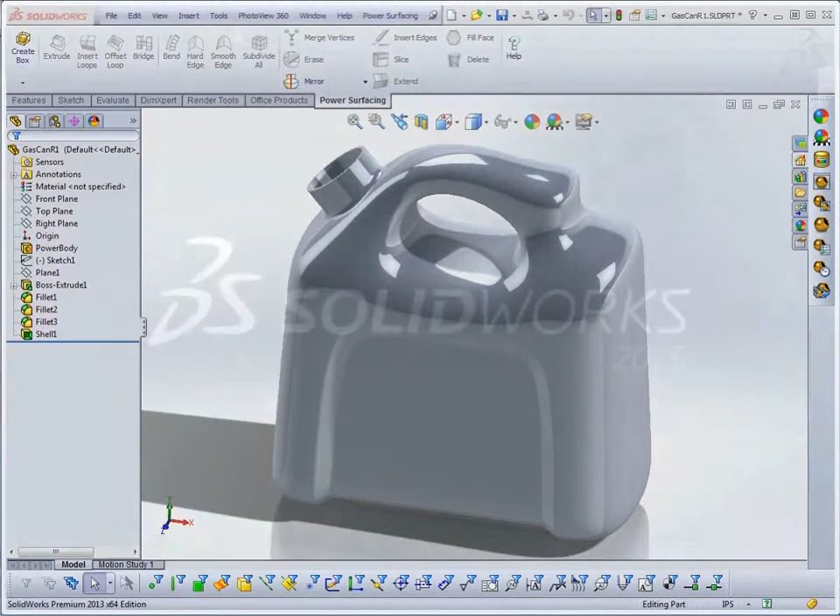Today I'm going to create a variation on the classic gas can using Power Surfacing in SolidWorks. There are a couple of different methods you can use to get started, but for this one I'm going to start directly in the Power Surfacing tab, Creation Tools, and Create Box. This automatically creates a new part file. The box primitive is centered on the top plane at the origin point.

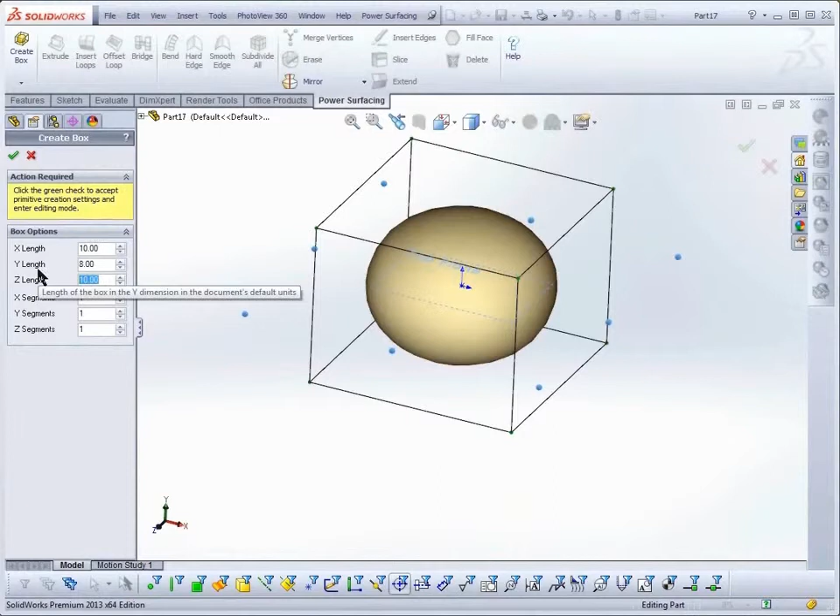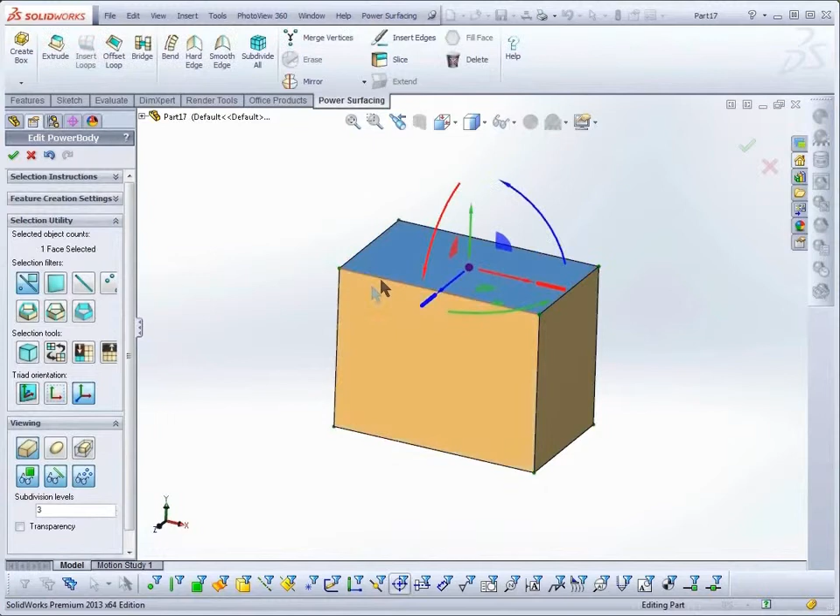I want my box-shaped control mesh to be 10 by 8 by 6, so I'll type in the size and then accept to go into edit mode. The default display mode is SubD plus cage. The more subdivisions you have, the closer the SubD resembles the control mesh. So until I've added a few more loops, I'm going to toggle control mesh display mode on in the viewing section. I'll start by selecting the top face of my box and scaling it in on the world Z-axis.

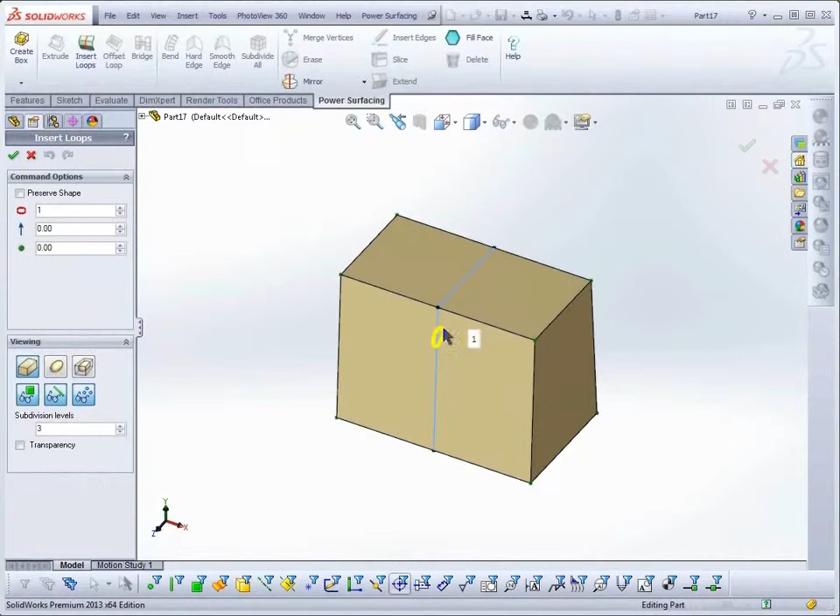Since I'm in Select Any mode, I can hover over an edge, double-click it in the center to select the edge ring, and then from the right-click menu, choose Insert Loops. I need a couple of loops, so I'll use the Increment Value gizmo and drag up in the viewport to increase them to 2, then right-click to accept.

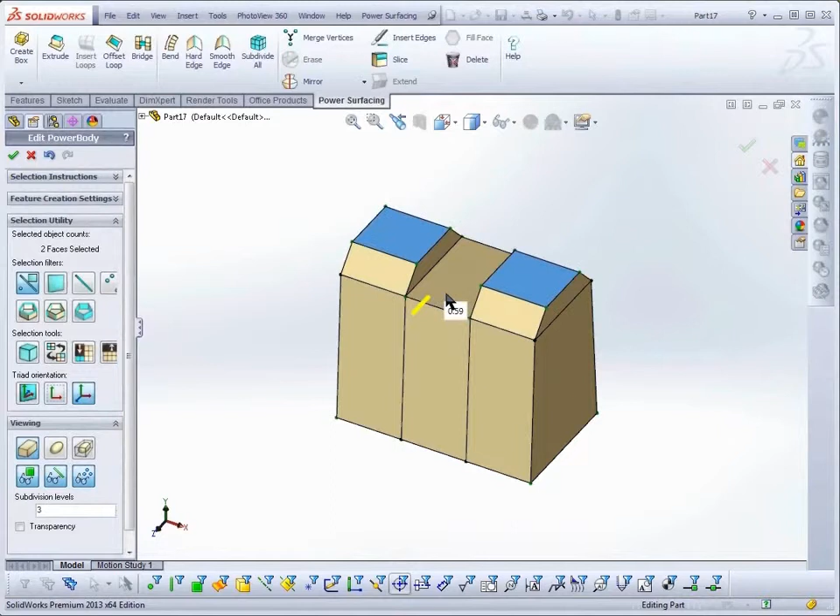Back on top, I'll select the two outer faces by holding the Control key down, then switch to the A key while pulling the Y-axis of the triad up for a quick extrude. While I'm there, I'll scale them in a bit, and move the front edge back to start to define the slope where the spout will go.

I'm going to need one more loop at the back. For edges, if I hold the A key down and hover over an edge, I get a preview of the loop to be inserted, and then I can click where I want it. It's important to remember that the SubD edges will not end up where the control mesh edges are, so there's no reason to try to be exact at this stage. Now I'll switch to just face mode while I make the handle.

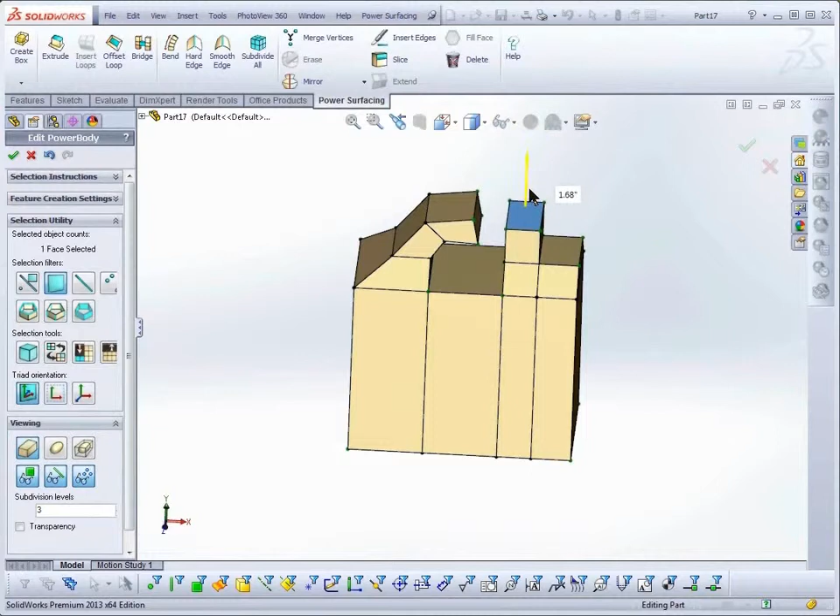I want the front of my handle to flow back from the spout, so I'll extrude using the A key and rotate the top face a bit. Then, using the local coordinate system, I'll scale it in a little and extrude again. Next, I'll extrude the back piece to match. After selecting my two faces, I'll pick Bridge from the right-click menu and Accept. This time I'll use the familiar green check mark. I'll select the new faces and scale them in.

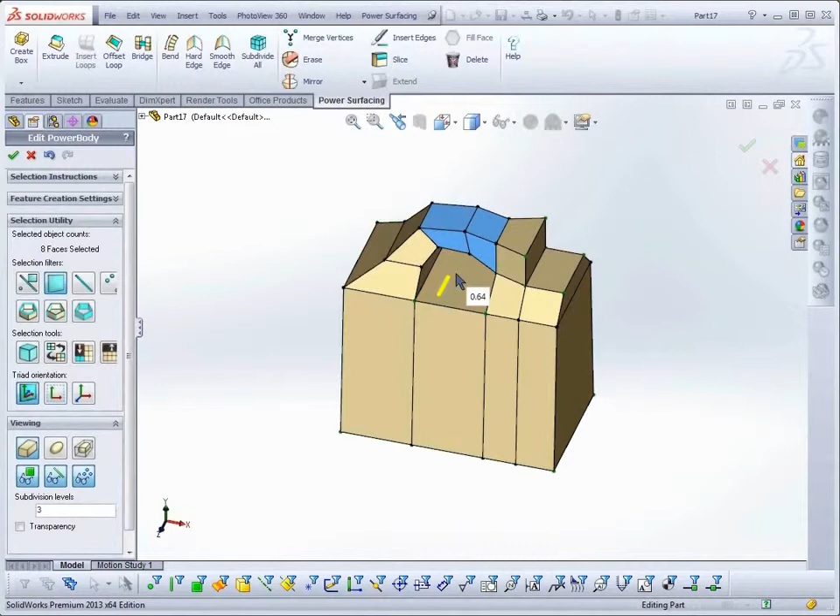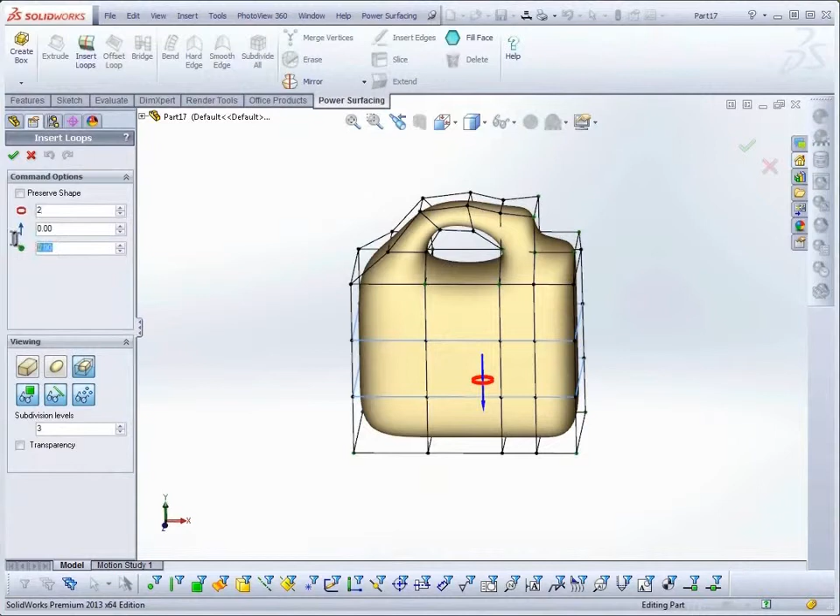Just to show you what a few extra loops can do to the shape, I'll switch to SubD plus cage for a minute. The body of the gas can is still pretty rounded near the base. So I'll select my edge rings and use Insert Loop again, and set the loop count to 2. But this time I'm going to set the pinch loops to 50 to spread them apart so the SubD is pushed out closer to the control mesh cage. And right-click to finish. Now I'll select the SubD display mode from the viewing section.

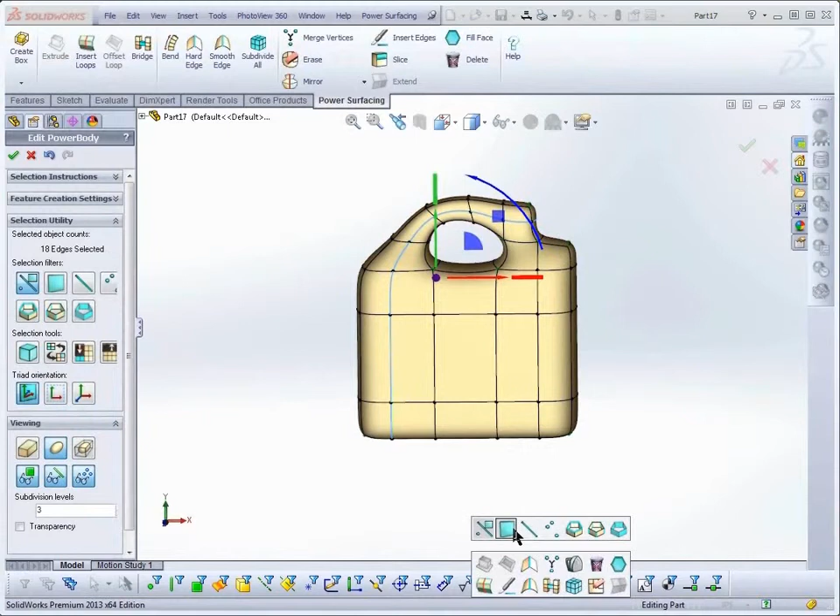To get the inset area, I need to drop one more loop near the front of the model. I'll do this using the A key again. Now I'll select the interior faces, and from the right-click menu, select Hard Edge to give it a weight of 100%. Next I want to use Offset Loop, also from the right-click menu. And once again, I'll add an edge weight to my selection with Hard Edge. Weighted edges will be retained on conversion, allowing you to add fillets or chamfers. I need to scale the offsets in first. Let's go ahead and make the conversion.

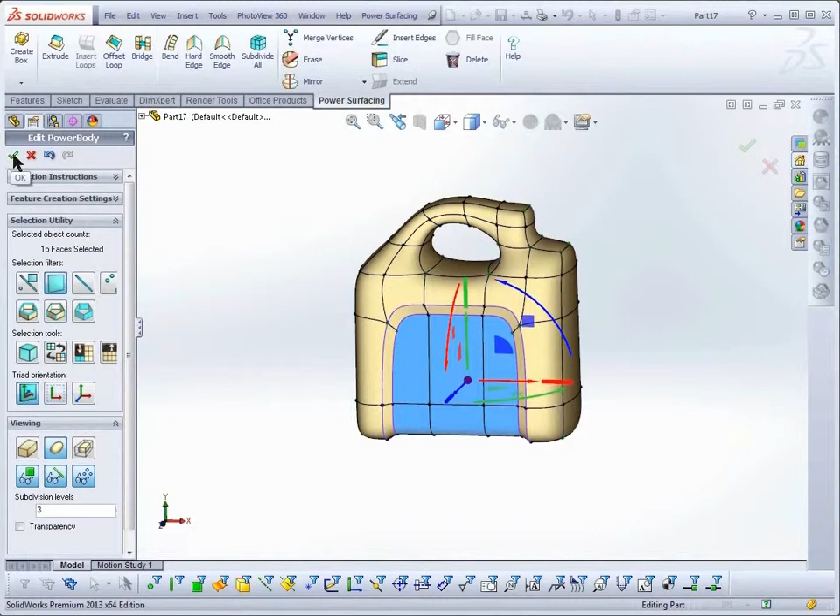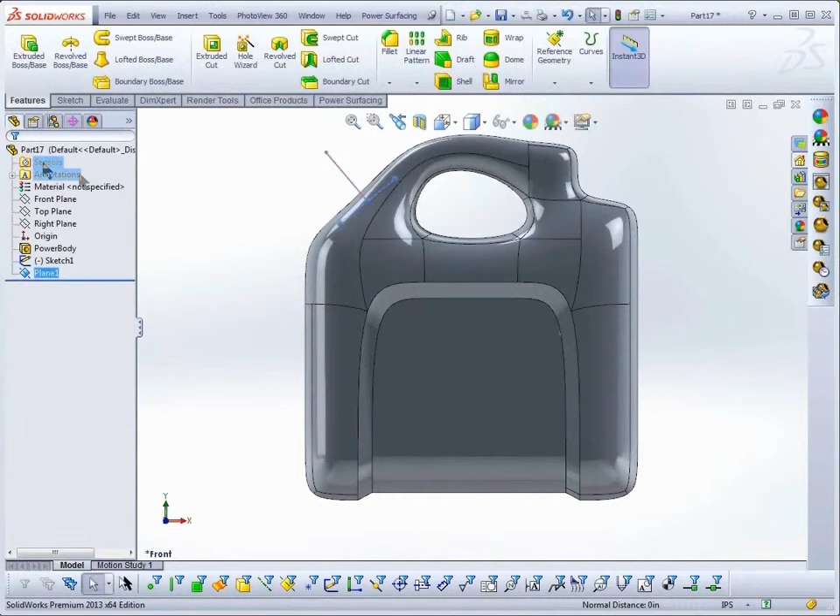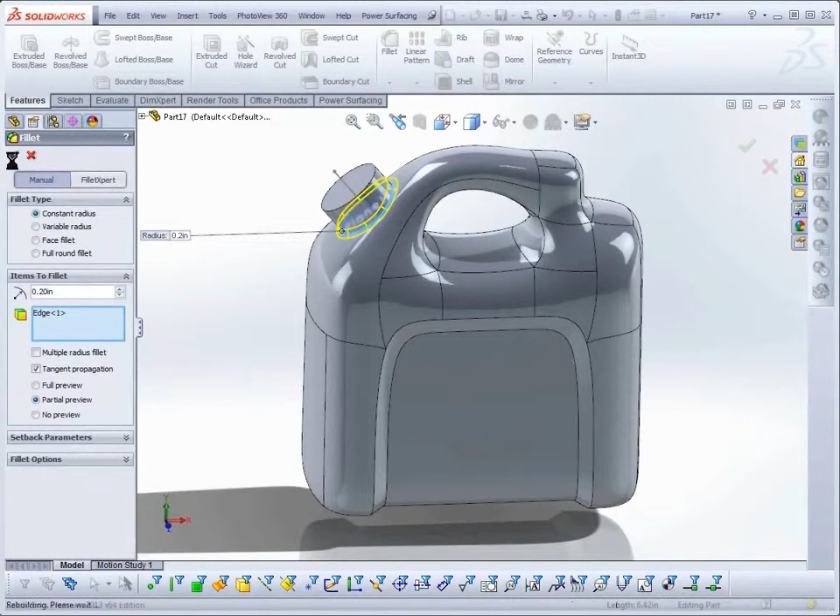From here, I can make a new sketch for the spout. I'm using a line to get the angle to create a plane on, and then creating a circle to extrude for the spout. I want a nice big fillet where it connects to the SubD body. And then some fillets around the hard edges for the inset. Next, I'll add a shell of about 0.1 thickness, and then I'll check out the result with Section View.

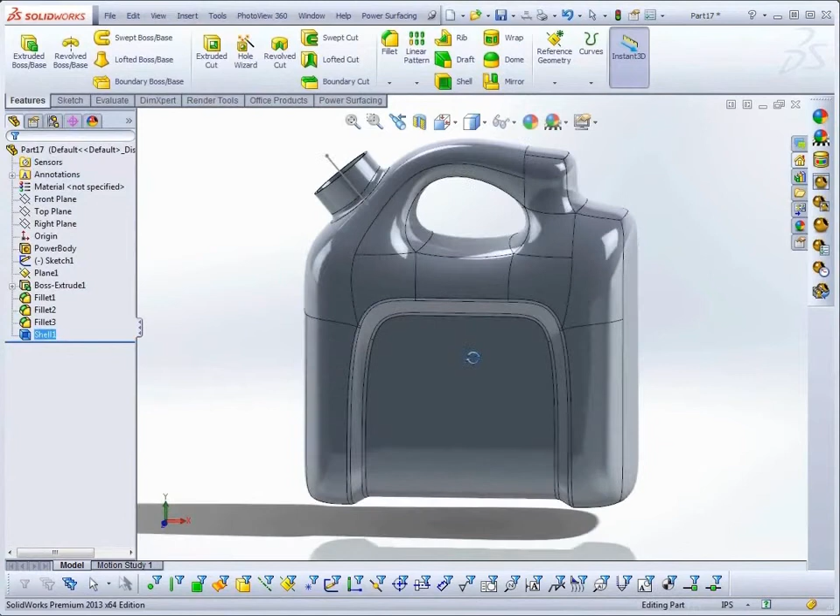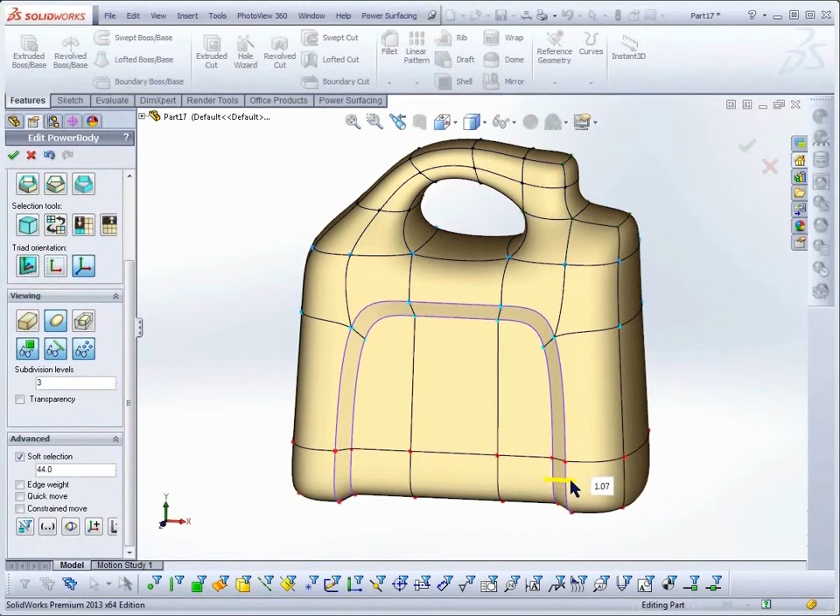I might want to go back and make some minor adjustments to the body. I'll click on my PowerBody to get Edit Feature and return to Edit mode. From the Advanced section, I'll turn on Soft Selection, grab the bottom vertices, increase the distance, and scale, and convert. And my feature tree is intact.